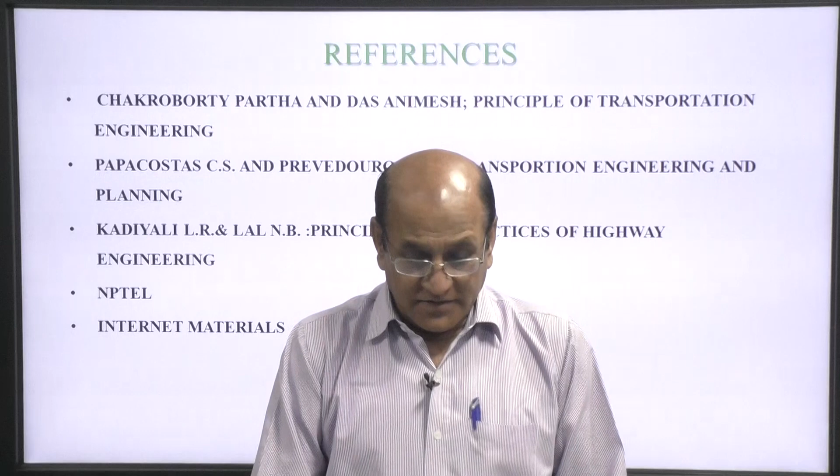References that I have taken: Chakroborty Partha and Das Animesh, Principles of Transportation Engineering; Papacostas and Prevedouros, Transportation Engineering and Planning; Kadiyali and Lal, Principles and Practices of Highway Engineering. Some material has been taken from NPTEL and some material has been taken from the internet.

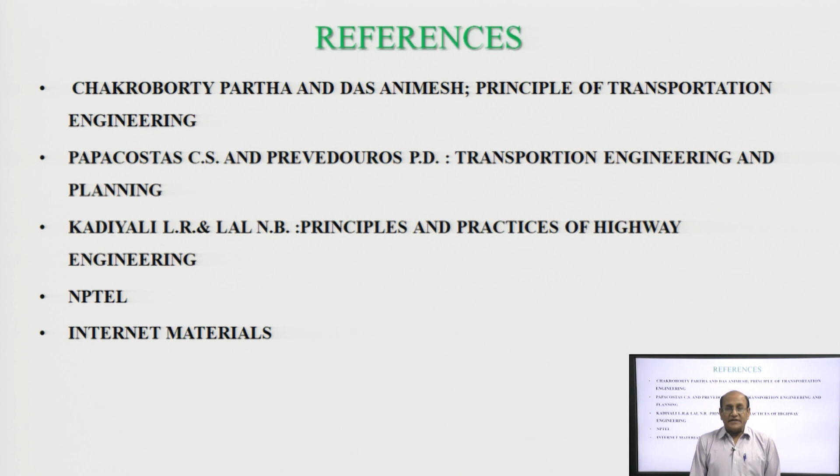The contents we will take up today: travel demand forecasting, transportation demand, land use, trip purpose, travel decisions, sequential demand analysis. So, first of all we will take up travel demand forecasting.

Travel demand forecasting is the process used to predict travel behavior and resulting demand for a specific future time frame based on assumptions dealing with land use, the number and the character of trip makers and the nature of the transportation system.

Travel demand forecasting utilizes a travel forecasting model and attempts to answer questions such as how many trips will be made in future, which transportation system will become congested in future, how much ridership will a new transportation service attract.

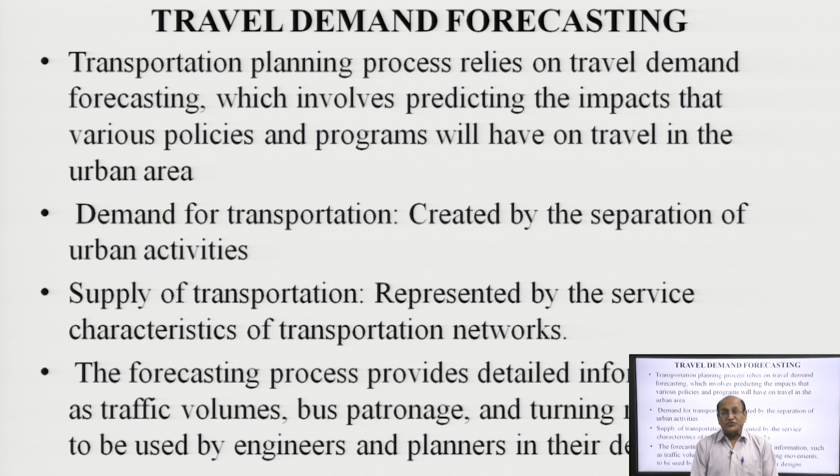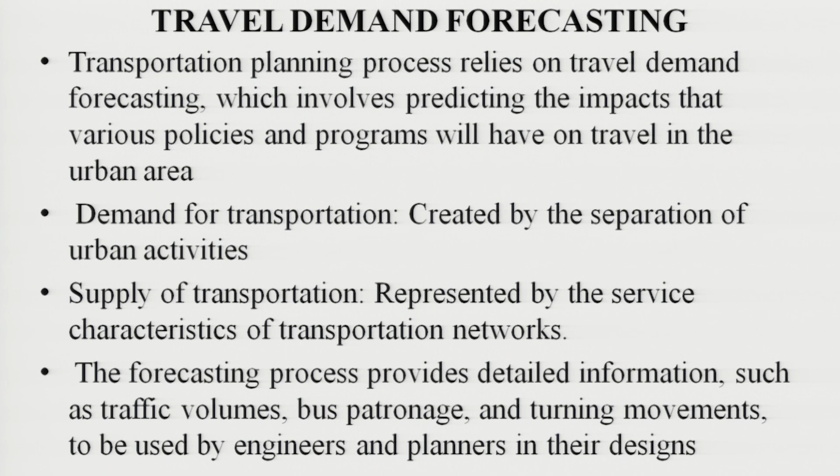The forecast process provides detailed information such as traffic volume, bus patronage and turning movements to be used by the engineers and planners in their designs. Travel demand forecasting, we will take up different steps.

In step 1, trip generation, forecast the number of trips that will be made. In step 2, trip distribution, determine where the trips will go. Step 3, mode choice, predict how the trips will be divided among the available modes of travel.

Step 4, traffic assignment, predict the route that the trips will take, resulting in traffic forecasts for the highway system and ridership forecasts for the transit system.

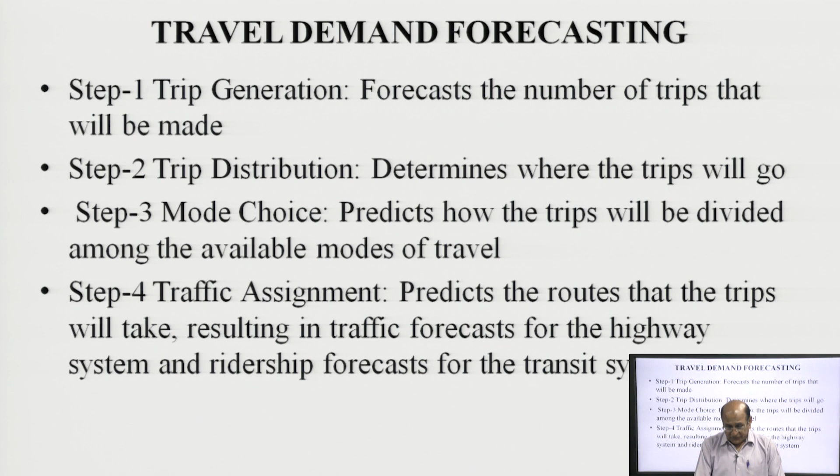Transportation demand is the demand for trips that exist in any area. All of the demand may or may not materialize into physical trips, and some of it generally remains latent and is referred to as hidden demand. Transportation demand is a derived demand.

It is very important, because trips are usually not made for themselves, means no one will wander on the roads, but we have to go to school, then a trip will come into existence. When we go to the market, then the trip will come into existence. So, in this way transportation demand is a derived demand.

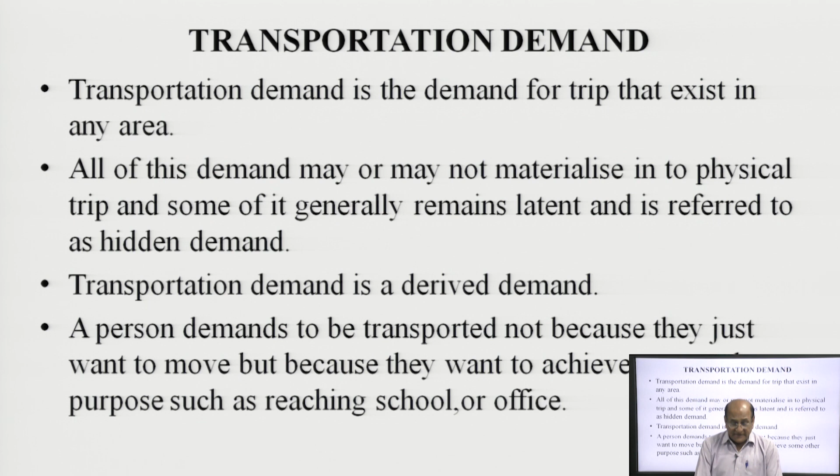A person demands to be transported not because they just want to move, but because they want to achieve some other purpose such as reaching a school, office, etc. The need for achieving some goal creates the need to travel. Travel demand is primarily generated by the population's need to work, entertain, socialize, study, etc.

Two of the major aspects in travel demand analysis are land use and trip purpose. Land use refers to the pattern of land use in the urban areas. Land use affects the transportation demand through generation and distribution of trips. The effect of land use on transportation demand is not necessarily a one way effect, but rather a part of a cycle in which land use changes transportation needs, which in turn changes land use.

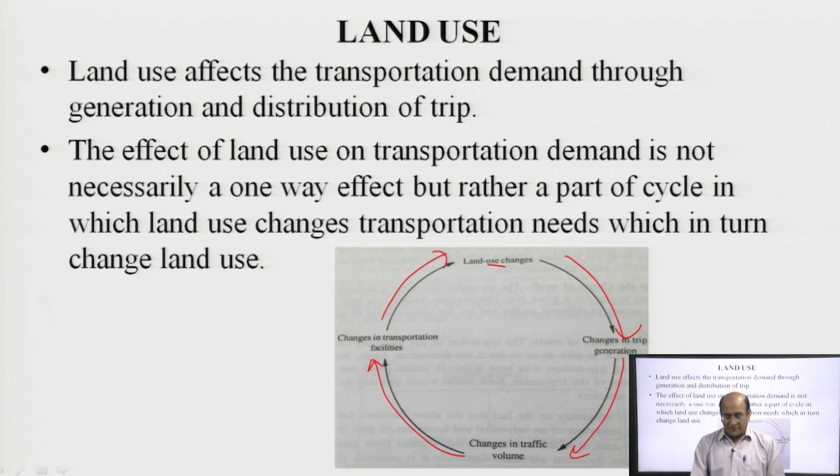Trip purpose refers to the purpose for which the trip is being undertaken. Travel demand behavior changes with the trip purpose. For example, a person hardly exercises any choice for work trips, that is, does not necessarily decide every time whether to go to work or not. A person obviously does not decide where to go to work, even the choice of route and mode are not daily decisions.

On the other hand, for a recreational trip, an individual makes a large number of decisions such as, first, whether to go or not, where to go and how to go. These questions are asked every time by every person. Consequently, the travel demand behavior for work trips varies considerably from that of recreational trips. The example can obviously be extended to other types of trips such as shopping trips, etc.

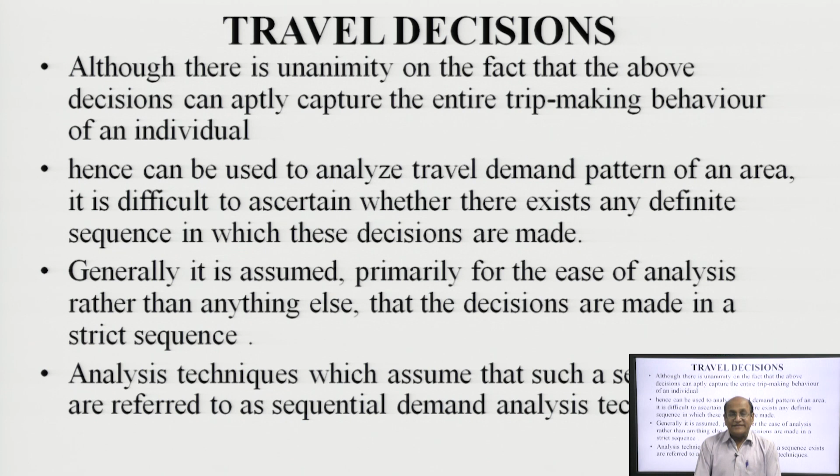So, here he has to purchase cloth, so he has taken the decision to travel. The second step is the decision on choice of destination, because there are a number of places from where he can buy clothes. So, he will have to decide which place he is choosing for purchasing. After this, the next is the decision on choice of mode, which mode he will use to go to that particular place: two-wheeler, four-wheeler, hired vehicles, shared vehicles, etc. And after that, he will decide which route he will take for purchasing the clothes.

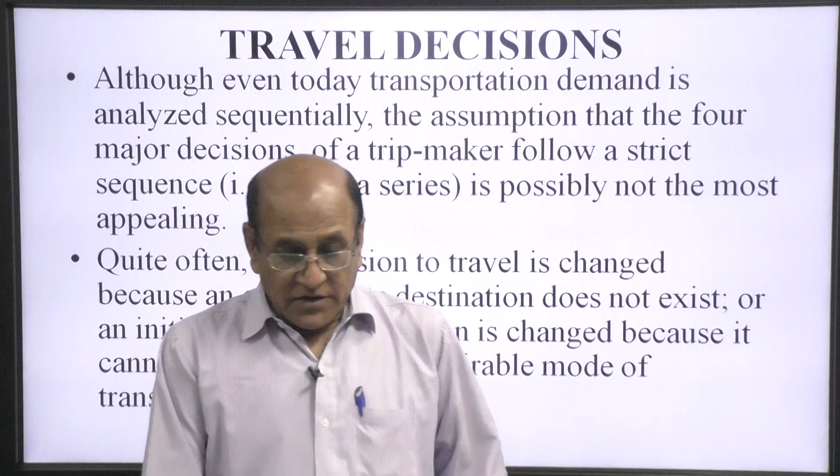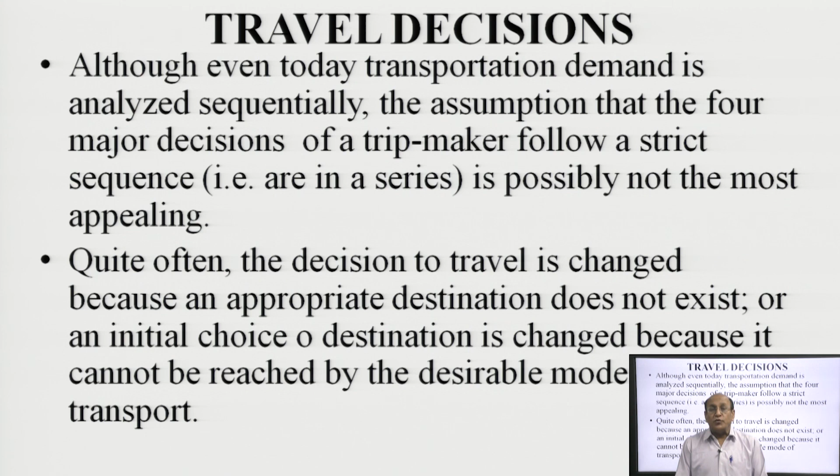Although even today transportation demand is analyzed sequentially, the assumption that the four major decisions of a trip maker follow a strict sequence in series is possibly not the most appealing. Quite often the decision to travel is changed because an appropriate destination does not exist, or an initial choice of destination is changed because it cannot be reached by a desirable mode of transport. So, this may be changed.

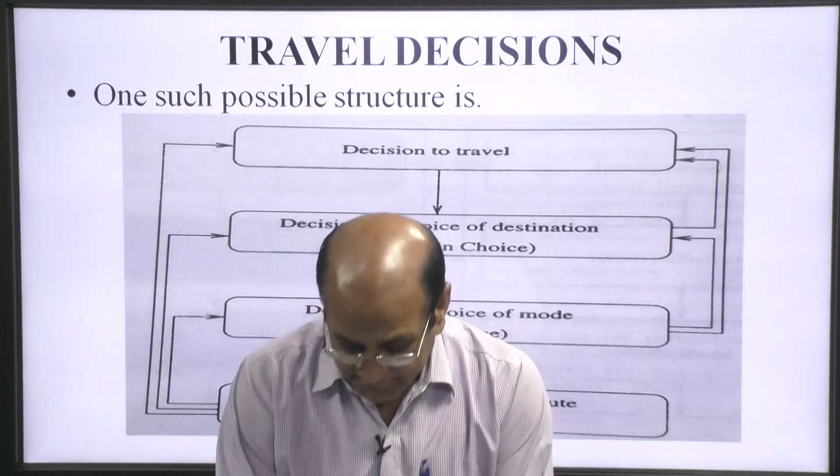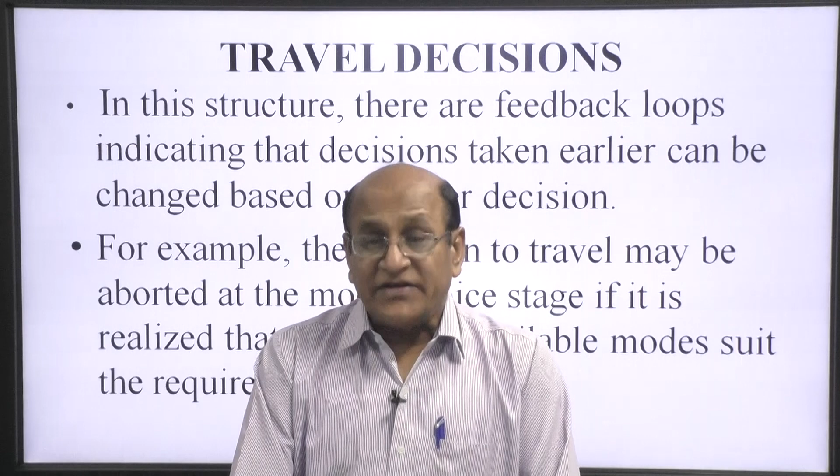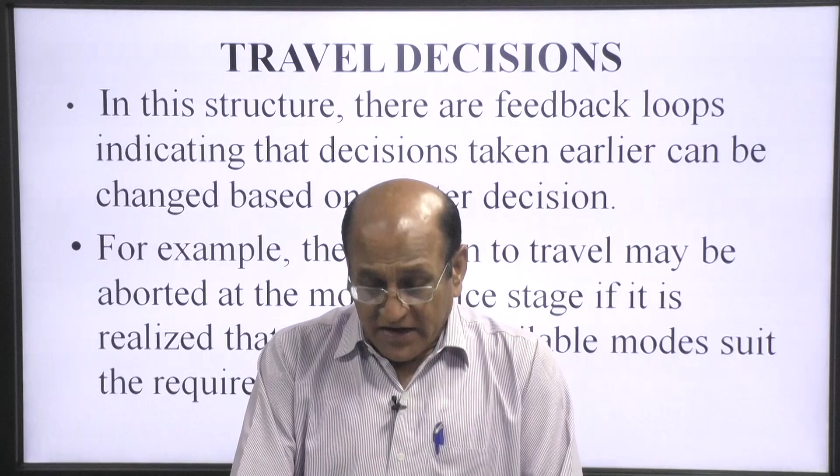So, travel decisions again, we have the same diagram. This is the structure of sequential demand. In this structure there are feedback loops indicating that a decision taken earlier can be changed based on a later decision. For example, the decision to travel may be aborted at the mode choice stage if it is realized that none of the available modes suit the requirements. Then, sequential demand analysis.

Even though the assumption of existence of a strict sequence in the decision making process of a potential trip maker may be debatable, generally, sequential demand analysis is used to determine the travel demand. As will be seen throughout this section, even with this simplifying assumption of sequential decision making, the analysis of transportation demand remains sufficiently complex.

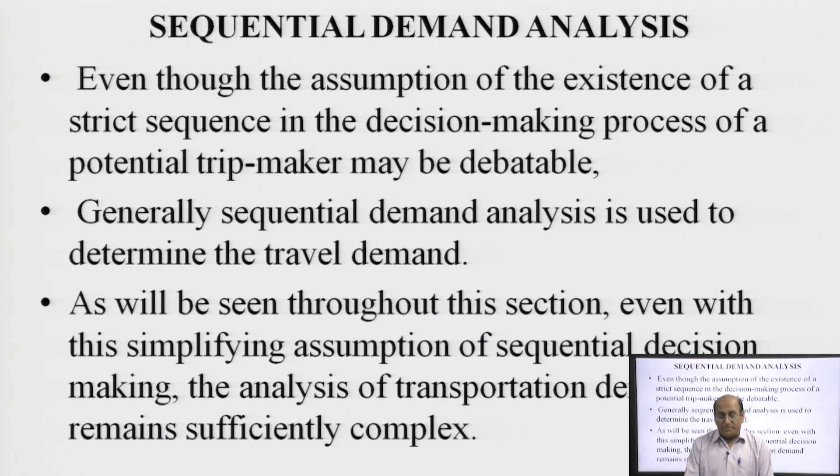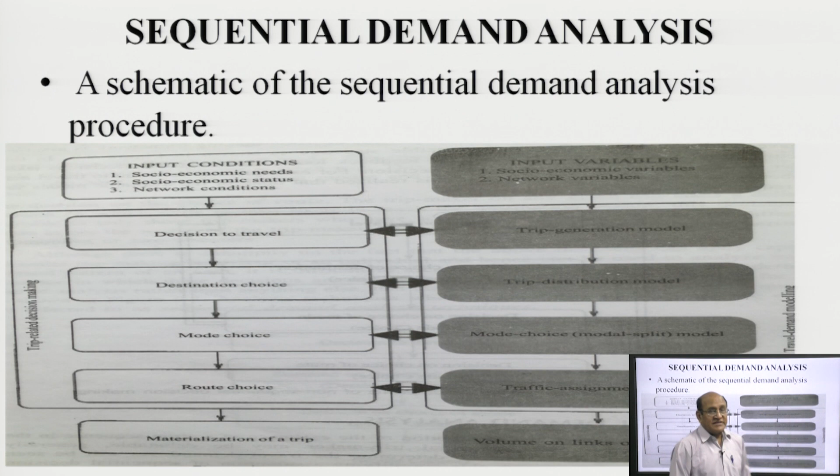So, here a schematic of the sequential demand analysis procedure is given. These are the inputs, input conditions that include socio-economic need, first of all; second, socio-economic status; and third, network condition. These are the basic inputs for the sequential demand, and these are the decision to travel, destination choice, mode choice, route choice, and materialization of a trip.

So, we can see here the input variables. What are the variables? Socio-economic variables and network variables. So, we can say on the first decision the trip generation model will come into existence. Then the destination choice, the trip distribution model will come. And the third, mode choice or modal split will come into existence.

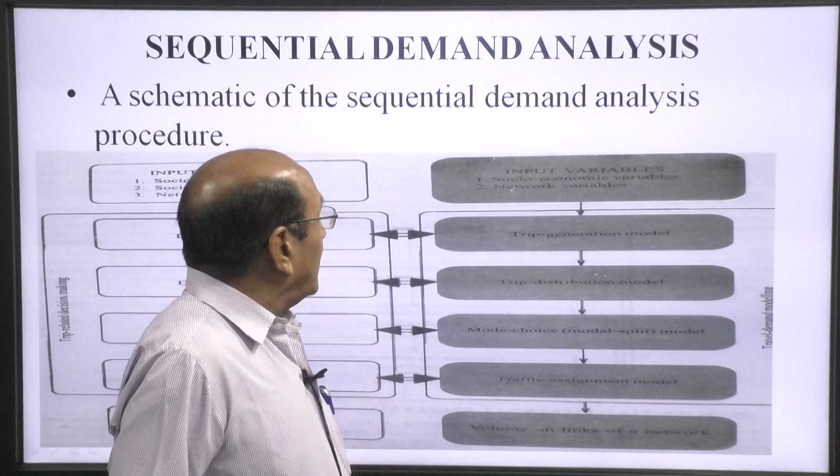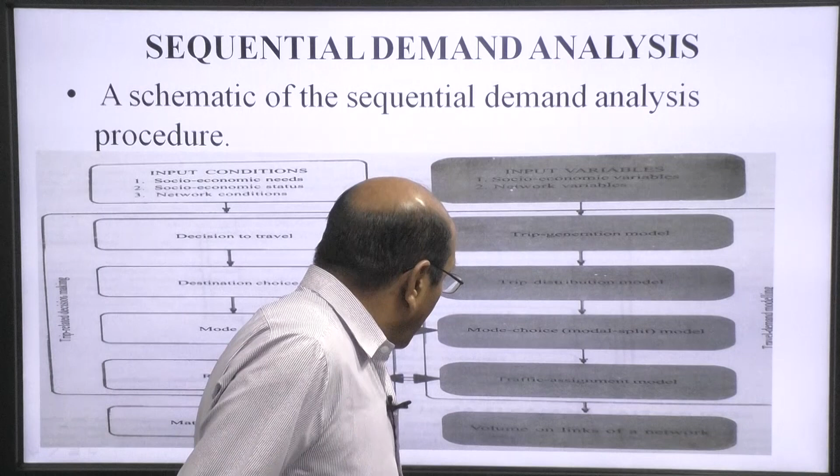And the fourth, after taking the decision of all above 3, then the traffic assignment model will come into existence. And finally, the volume on links of a network. So, this is the sequential demand analysis. On the basis of that, that could be done.

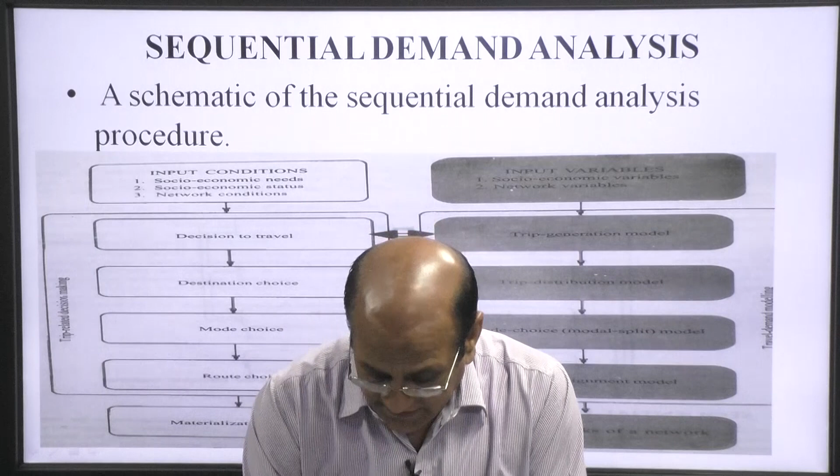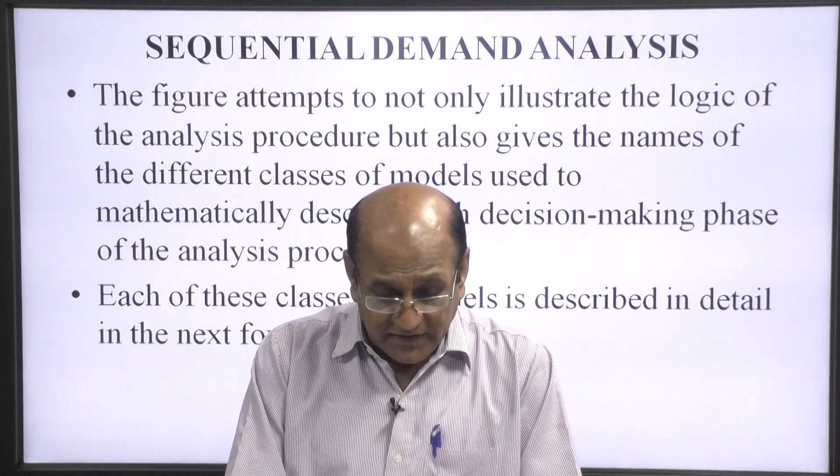In the sequential demand analysis, the figure attempts to not only illustrate the logic of the analysis procedure, but also give the names of the different classes of models used to mathematically describe each decision making phase of the analysis procedure. Each of these classes of model is described in detail in the next 4 sections. Before presenting a model, a general overview of the entire process is provided.

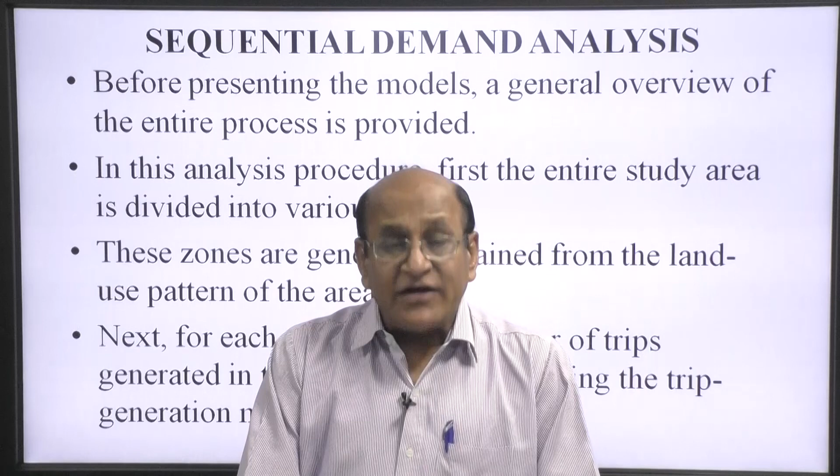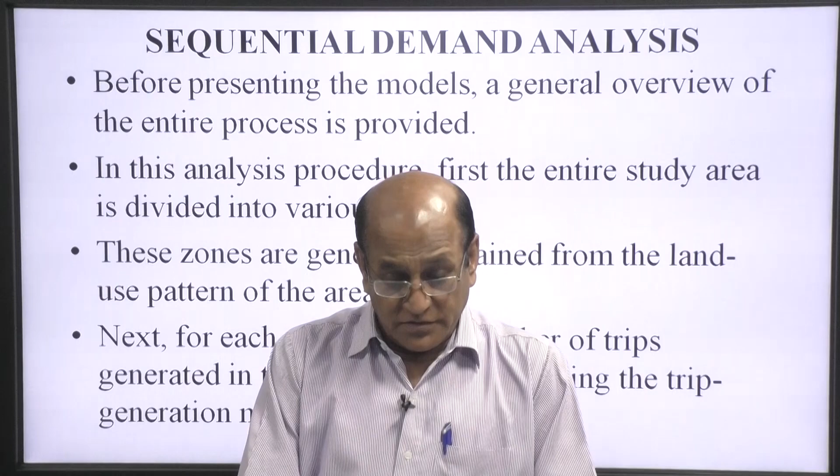In this analysis procedure, first the entire study area is divided into various zones. These zones are generally obtained from the land use pattern of the area. Next, for each zone, the total number of trips generated in that zone is estimated using the trip generation model.

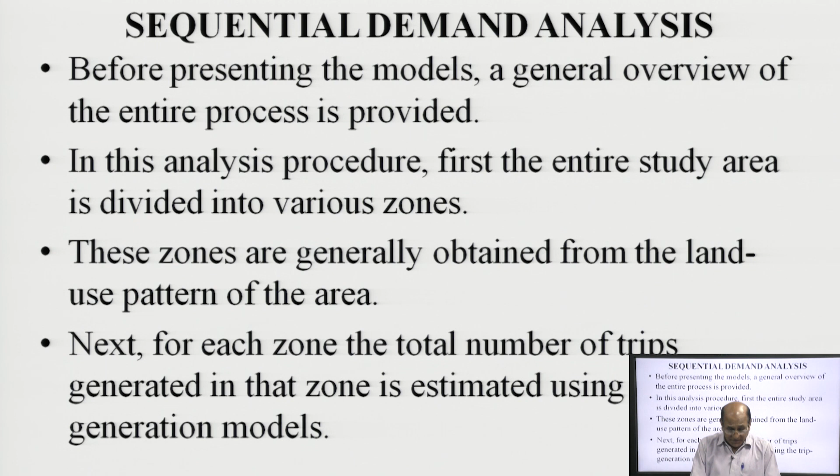Given the trip distribution pattern, which is often referred to as the origin destination OD matrix, the relative share of these trips for different modes is estimated using the mode choice model. Finally, the traffic assignment model estimates the volume on each link of the network by determining the route that will be used by the trip.

The basic thing is the whole area under study is divided into different zones depending on the physical or geographical boundary. And in each zone, how many trips are generated and how many trips are attracted in each zone. Then we prepare an origin destination OD matrix. How will we prepare it?

Suppose a certain number of trips are generated in a certain zone. So, these trips are origins of trips. Out of these origins generated, the trips are divided into different zones, zone 1, 2, 3, 4, 5, 6, and the summation of all these trips will be equal to the number of trips generated in zone 1. Likewise, each zone will create certain trips and will attract certain trips also. So, in this way we can make an OD matrix.

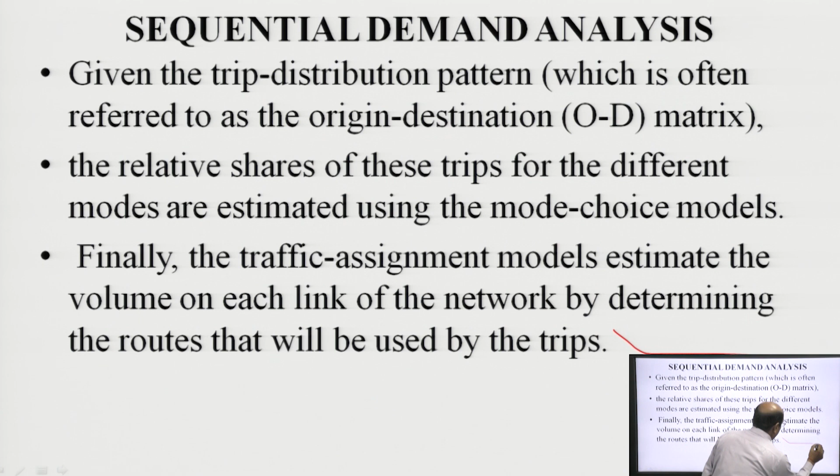Say this is the attraction 1, 2, 3, these are the zones 1, 2, 3. Number of trips generated in zone 1, suppose that is 100. So, 100 trips could be divided into zone 1, meaning itself, then zone 2, then zone 3. So, the total will be equal to the total number of trips.

The trips generated in zone 2 will again be distributed or attracted in zones 1, 2 and 3. The total summation of trips in zones 1, 2 and 3 will be equal to the total number of trips generated in zone 2, and the same way for zone 3. So, we can see the total number of trips attracted in a zone will be the summation of these.